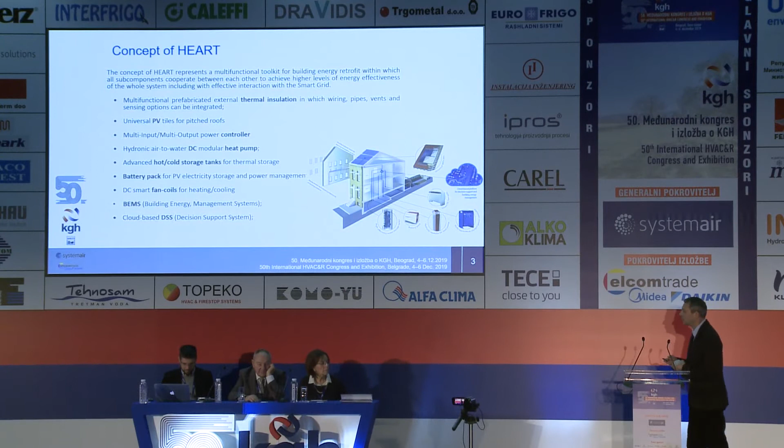I will go to the concept of the HEART. So this concept is shown here. You can see that the buildings will have photovoltaics on the roof. These photovoltaics will of course produce electricity, and one part of the electricity will be stored in the accumulators, but the other part will run a DC heat pump, and the energy will be stored as heat or cold in the storages. So this is the idea, because we can store the energy very efficiently also as heat and cold for heating and cooling of the building.

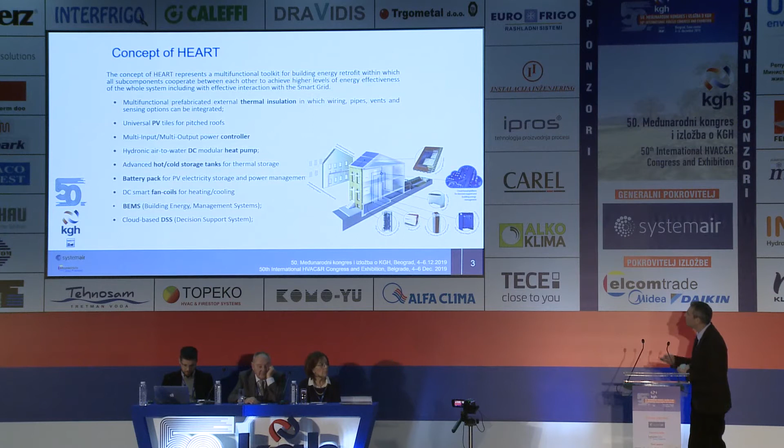And of course we'll use the pipelines in the blocks where we'll distribute the water, and in the apartments we'll also have a small heat pump where we will use this energy, but I will explain this later. You can see the other components of our systems, so the PV, the controller, the heat pump, the cold and hot storage tank. So this is our work in this project. We also have a battery, fan coil, building energy management system, and decision support system.

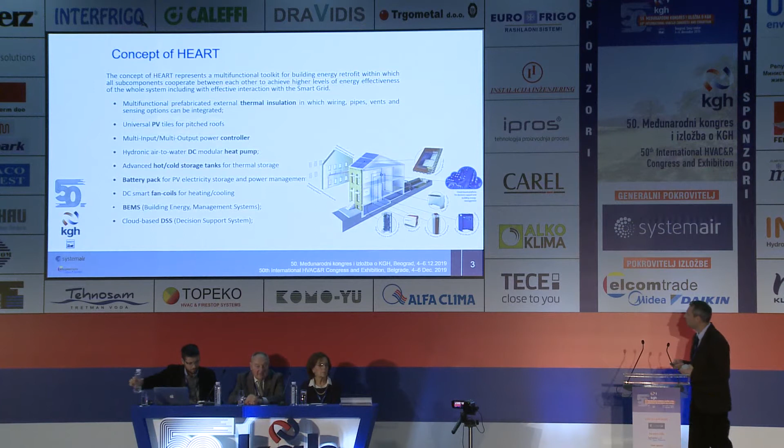We are using latent phase change materials. So if you compare it with sensible storage, we know that with a sensible water storage, the temperature of the water is increasing. But when we have a phase change material, it means that we use a material which changes its aggregate state from liquid to solid and from solid to liquid.

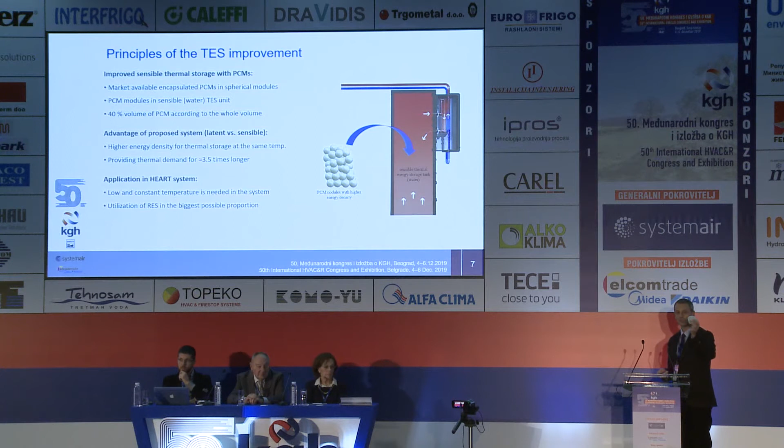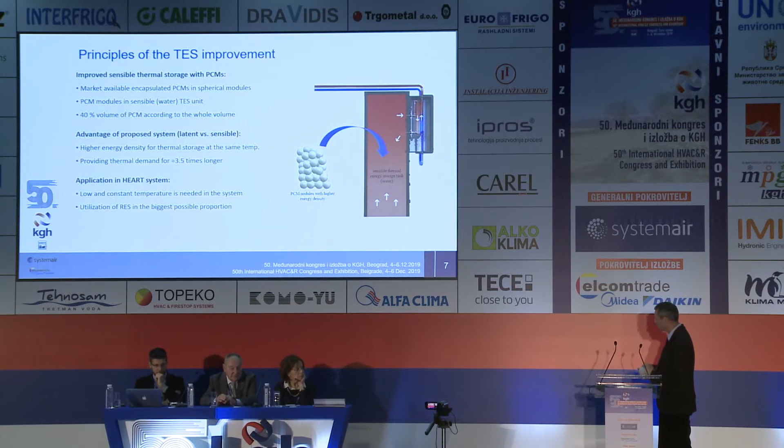So the idea is to use such balls which I have here. In these we have phase change material, and with these balls we'll increase the accumulation of ordinary water storages. So this is the idea, just to use them as they are, and to put the balls inside and to increase the accumulation of the storages.

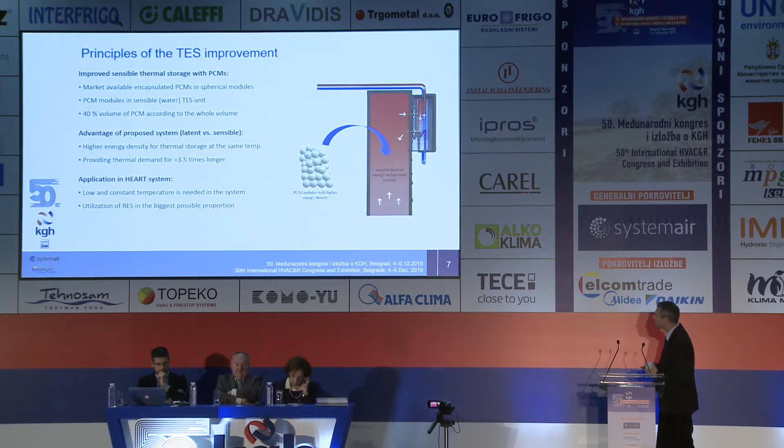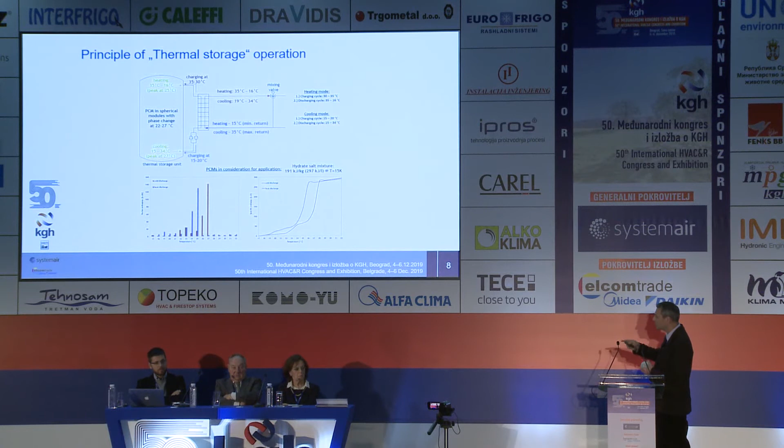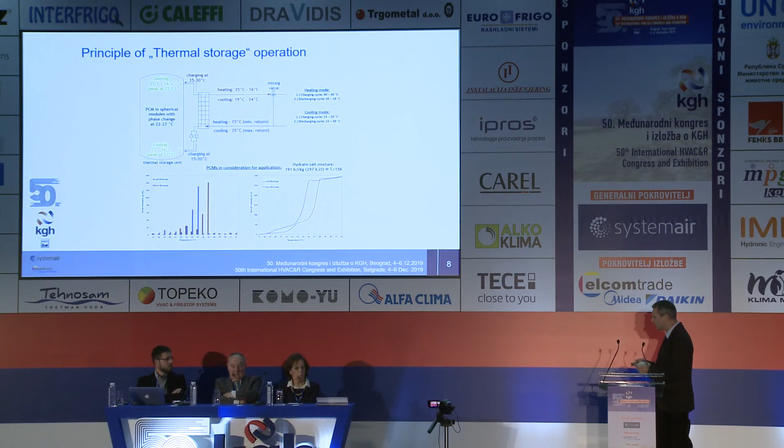And also here at the top, you can see that the system is connected to the heating system with the heat exchanger, because in reality they have some problems with leakage of the material, and it must not come into the heating system. So that's why we have a heat exchanger in between, and we also want to do it in reality, because in the project we'll refurbish 2 buildings, one in Italy and one in France, with this system.

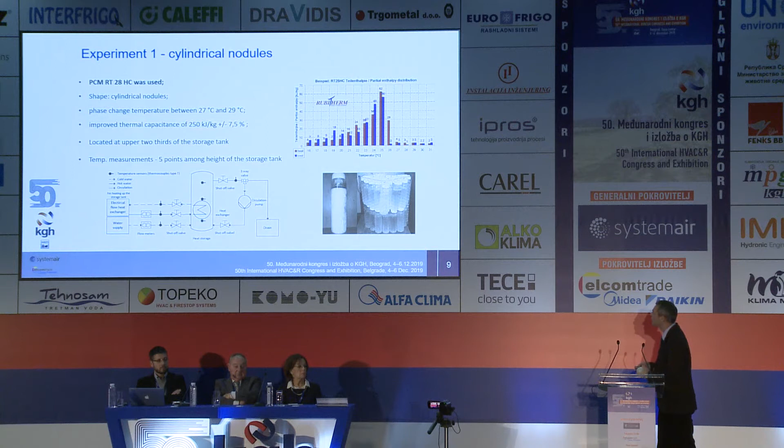I will present you 2 experiments here. The first experiment was, let's say, the prototype, the school or student system. Here we have used bottles. We filled them with the phase change material. The temperature was 27. You can see the capacity was 250 kilojoules per kilogram, and we have measured it.

Here you can see some results. We have increased the accumulation by numbers which were not very high, because if you have a low temperature difference, the share of melting heat will be higher. In this case, the temperature difference was quite high, and that's why the effect was not so high.

But the important thing was we also compared the experimental results with the simulation. So we have a TRNSYS model, or program, where we compared the experiment with the simulation. The simulation model was made by the Technical University of Graz.

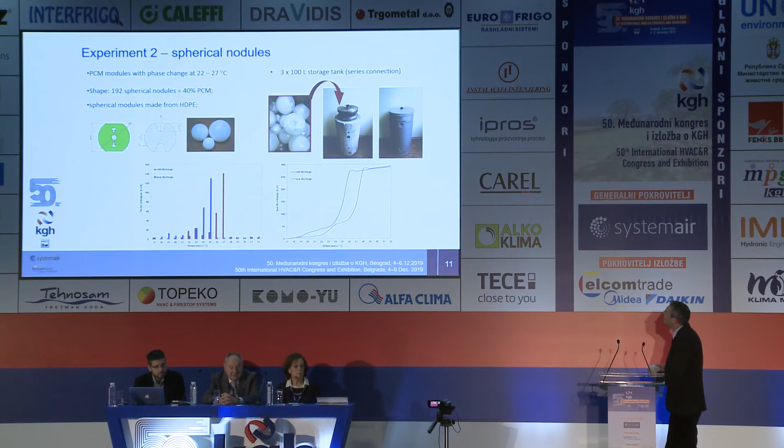The second experiment was, let's say, a real one. So we have used these balls. We have used 192 modules. We have integrated them in the accumulator. So we have used 100 liters of volume, and 40% of the volume was PCM.

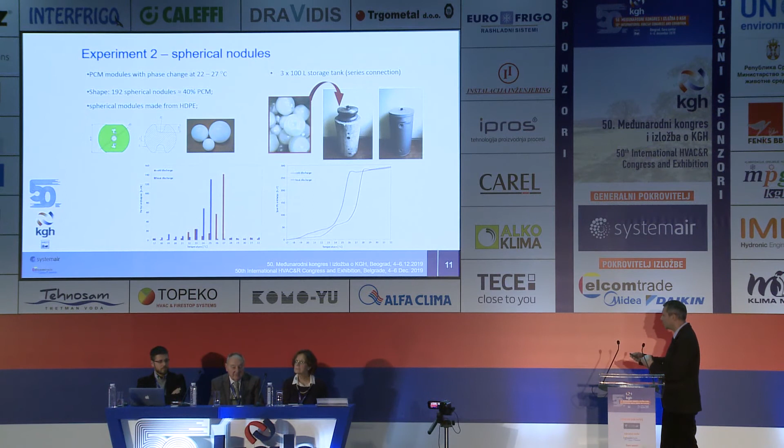Our idea was to test those thermal storages as batteries, so we have made 3 of them, and in this experiment you will see the, let's say, middle results, where we have connected them in series. So you can make it like batteries, in parallel or in series, it depends on what you have or what you want.

So here are the results for melting. So we cool down the water. We come with the water, the temperature you can see, and we cool down. And in the other slides you can see the solidification. So we come with just the opposite.

Those are preliminary results, because the project is halfway. We have done 2 years, and 2 years will still be done. So maybe in the next Congress we'll give you more information about the results.

Just for conclusion, some ideas. The market for renovation of buildings, the old buildings, is quite high. Latent thermal energy storage can be used for the accumulation of energy for heating and cooling. We come to 52% higher energy density. We would like to have it higher, so we will try to improve it. And two, let's say for me, very important messages.